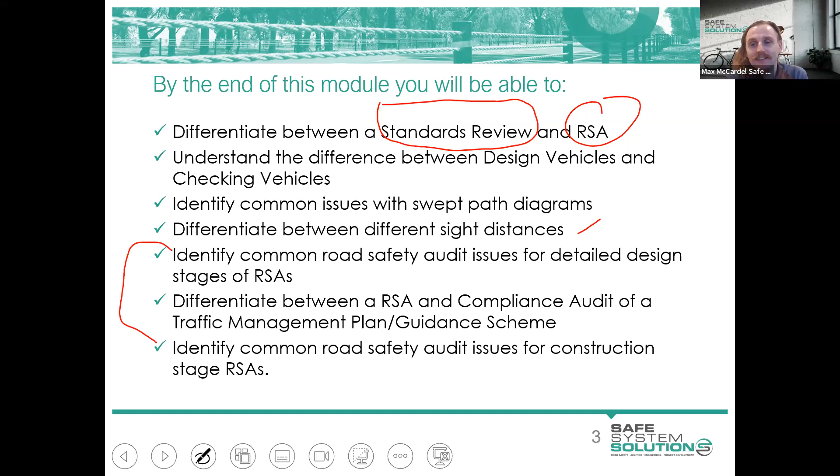This is something that's regularly undertaken as part of detailed designs, and can at times just be snuck in as an appendix and not really interrogated, but there's very good reason to be able to identify what's happening with those swept path diagrams and to be able to ascertain any risks with them. So we'll go through swept path diagrams, lots of different terminology to do with sight distances. And identify common road safety audit issues for detailed design, and then get stuck into the next module, which is all about temporary traffic management.

So I'll get stuck right into it and have a bit of a chat around, well, what is a standards review / design review versus a road safety audit? Those within the design space may be completely across this, and I won't be spelling out anything new, but for those unfamiliar with these terms, they do have two separate functions. A standards review can be undertaken by the design team, and it is just a check against all the assumptions made as part of developing any design.

So just take, if you're designing a roundabout. It'd be looking at all the lane widths, checking all the merge, lane tapers, all those kind of things, checking the circulating area, what is the radius of the roundabout, things like that. Going one by one through all the different variables and checking against Australian standards, the Austroads guides, and importantly, the supplements.

So first question I'll give out to the group is, if you are in the design space, so you're auditing designs, and you've got those Australian standards, you've got the Austroads Guide to Road Design, and then you've got the supplements. The supplements are your specific jurisdiction's additions to any of those other papers. Which one of those takes precedence? So which one would be most applicable to the designer? A few seconds there.

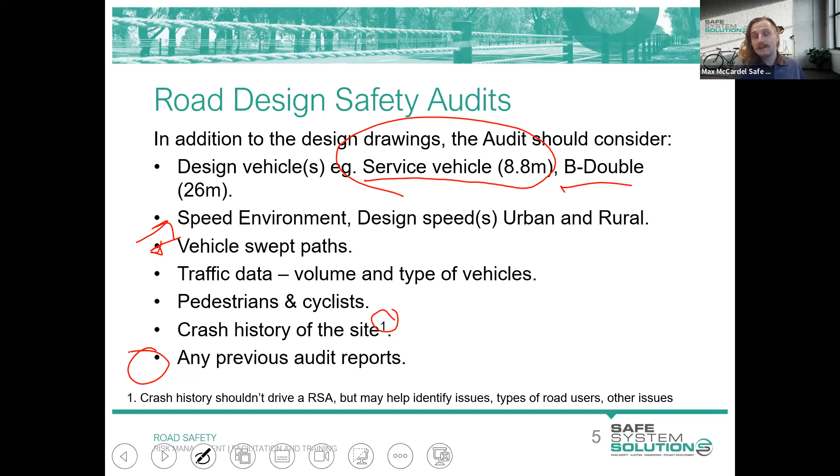Every now and then you'll also get previous audit reports within the area as well, mostly relevant to those larger projects where you will have likely a concept road safety audit. You'll have a functional or preliminary design road safety audit, and you'll have a detailed design, etc. So if you're able to just see how this project has progressed through those audit stages, that can give you additional information as an auditor.

All right, common road safety issues. So design vehicles and swept path. The design does not cater adequately for the swept paths of the chosen design vehicle, or the design vehicle is incorrect. So this was going back to what I was saying before, either having a check vehicle or the service vehicle, which is more common, that's going to be using that facility. So that is generally a garbage truck, just making sure that it can access all areas of our network and is able to safely maneuver around.

And the check vehicles, we do acknowledge that, just based on the sheer space that they require, it's likely that they will be encroaching on areas that are not necessarily the carriageway. So how do we cater for that? And it gets quite technical, because there is definitely an understanding that those larger vehicles could be in scenarios which are not an ideal situation. So they may be having to go across the curb, for instance, sweep across there, or access areas that are just behind the curb.

Ideally, you don't want them anywhere near pedestrians, but I'm sure, as we're all familiar, that does exist on our networks where there are heavy vehicle movements adjacent pedestrian areas, and there have been instances where pedestrians are just standing on the corner of an intersection and just pushing the signals to cross the road, and heavy vehicles that come around collide with those pedestrians.

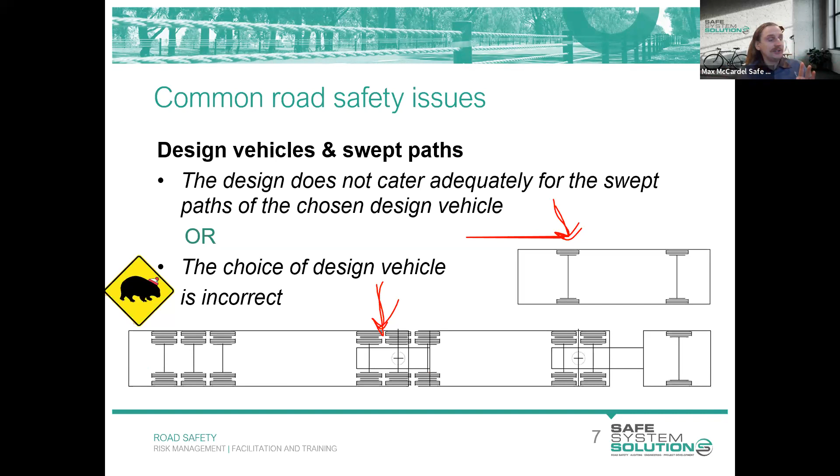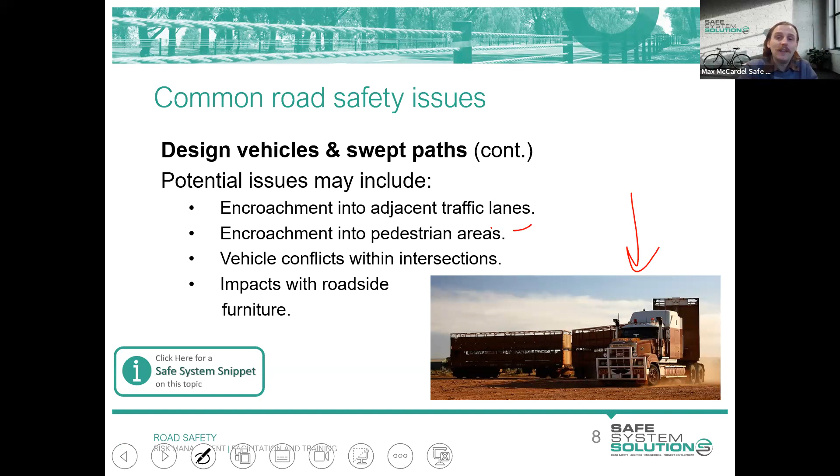Okay, I might just leave that there for the moment and continue going with our heavy vehicles. So as mentioned, it is not uncommon for these larger vehicles to experience encroachment issues. Encroachment just means heading off into the oncoming lane or into other adjacent traffic lanes. The one that we're particularly concerned about is encroachment into pedestrian areas. That's certainly not a good outcome at all. So you want to be picking those up during the design stages and flagging them as risks.

The reason I'm more concerned about that is because it only takes very, very low speeds for a heavy vehicle collision with a pedestrian to result in very, very serious outcomes, as I'm sure you could all appreciate, just given their size and weight. Conversely, if it's a heavy vehicle turning very slowly and they collide with another vehicle in a sideswipe kind of collision, or even a head-on type of collision, it's still not a great outcome, but it's unlikely to be as severe as with a pedestrian.

So certainly in our pedestrian areas, we should be really interrogating vehicle conflicts within intersections and impacts with roadside furniture. It probably won't take you too long, if you were driving along the network, to find signs that have been struck near intersections, and that is likely due to heavy vehicles just being unable to safely perform their movements, or the actual user behavior. They're traveling too quickly through there and getting their trailer stuck on signs and things like that.

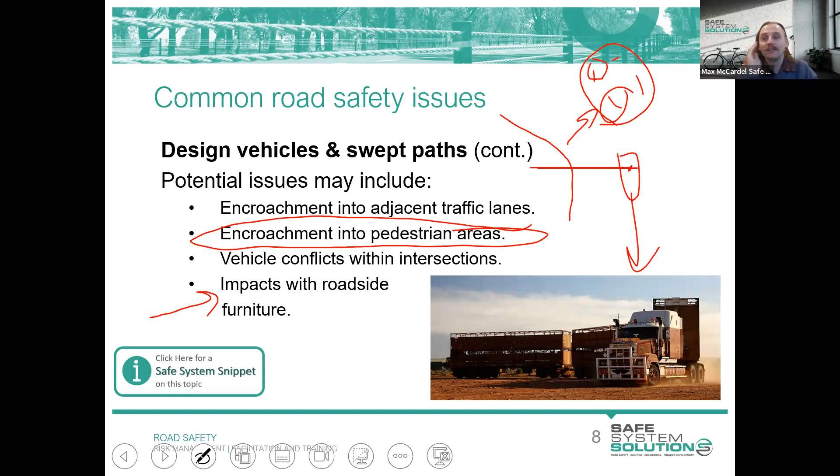The keep left sign, if you're at a roundabout and you've got a little splitter island there, and there's that keep left sign in the middle, that's always the most common one struck, I find. You could also have hazard boards in the middle there. They're also pretty common to be struck by heavy vehicles as well. So just something to make a note of within the design, and whether there's adequate widths there to allow for that swept path movement of your heavy vehicles.

All right, within the Austroads guides, within this appendix, there is a whole raft of information as to how to conduct swept path checks. They are all done by AutoTURN software now, so it's not done by hand anymore, but you need to put these inputs in, or you may already have those variables set up within your software. You need to know exactly where the tires are situated, where the wheel racks are situated, how many wheels you've got, where the articulation sits. You need to know all of those distances, as well as the turning radius at different speeds, which is everything that's provided within the appendices here for the Austroads Guide.

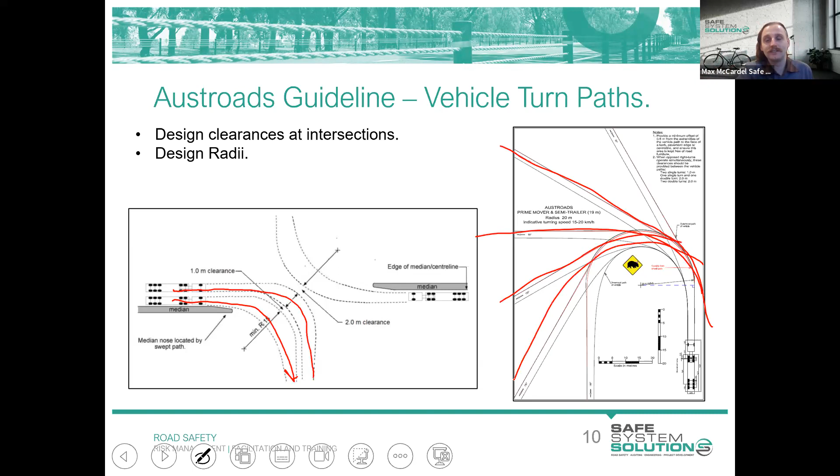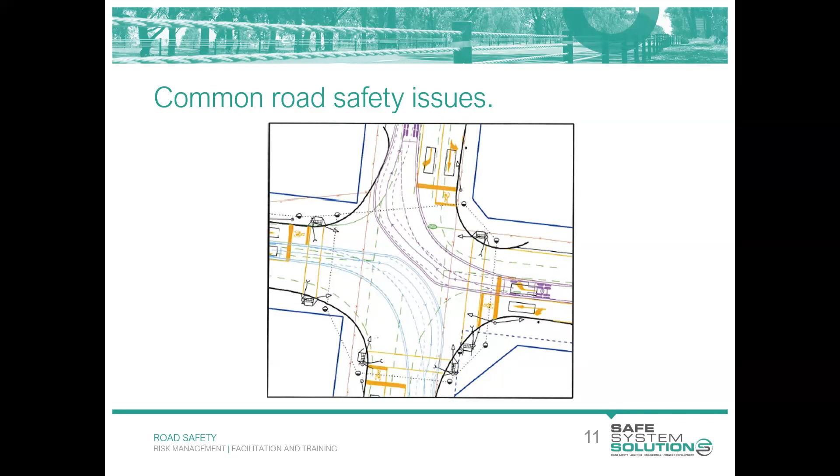Let's give a prize out there, Kathy. Oh, okay, good one. So that auditor's already got their eagle eye vision, spot on there.

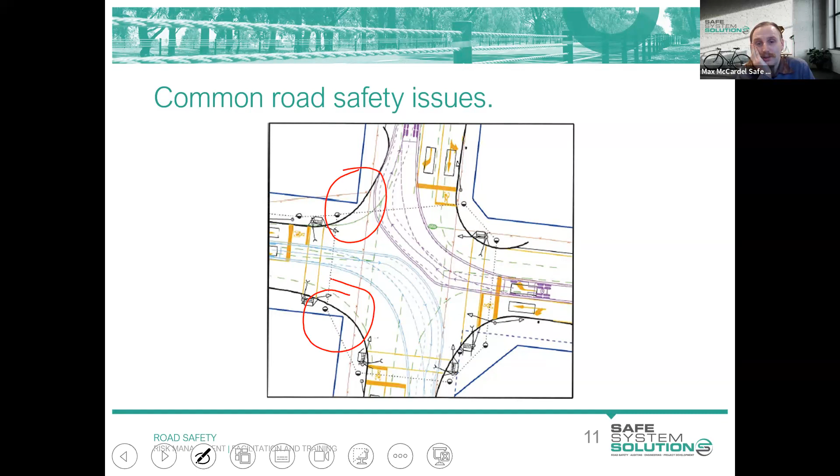I mean, all the footpaths look a little bit strange, but particularly that quadrant and that quadrant, there is really no adequate room there for pedestrians to be able to safely store and access the adjacent footpaths. So that is a pretty significant concern, and one that would require redesign to ensure that pedestrians have connectivity through that intersection. So that is another one I would definitely write up as an audit finding.

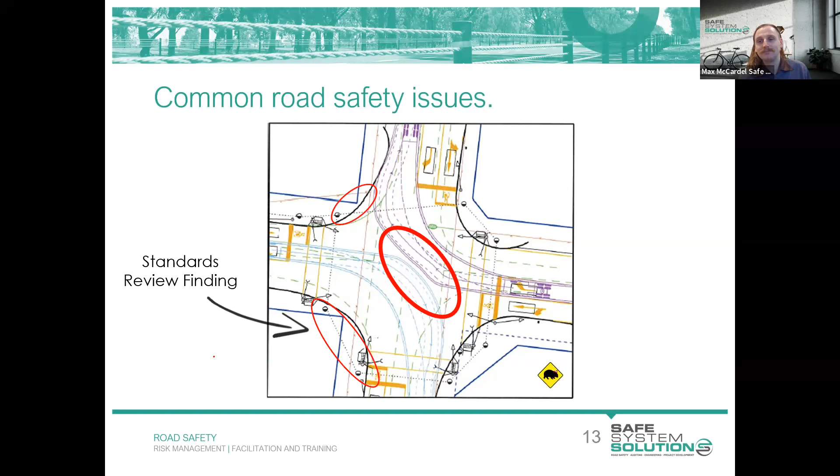The last one I was going to mention, and appreciate if you haven't seen this type of design before, you may not be across it, but these little symbols here are indicative of the pits for your signal hardware and stuff like that. So where all the cabling goes for your signals. And the dotted line is a conduit that runs generally the easiest, most direct way possible.

So that's why it's drawn like that. The issue with that is you're actually showing you're digging underneath an existing building where the property boundary is. So that should be a pretty big flag. That's going to be an issue. You can't just be digging up someone's house to connect from pit to pit.

Now, would you include that as a finding within your road safety audit? You could mention it, but it's really not a safety issue. And you really want to make sure that what you're putting within your audit table are safety risks and things that you've identified with the safety. It's incredibly likely that when this is to be constructed out on site, your contractors wouldn't start digging up buildings just to bring conduit from pit to pit, you would hope. So it's likely that that would be rectified on site.

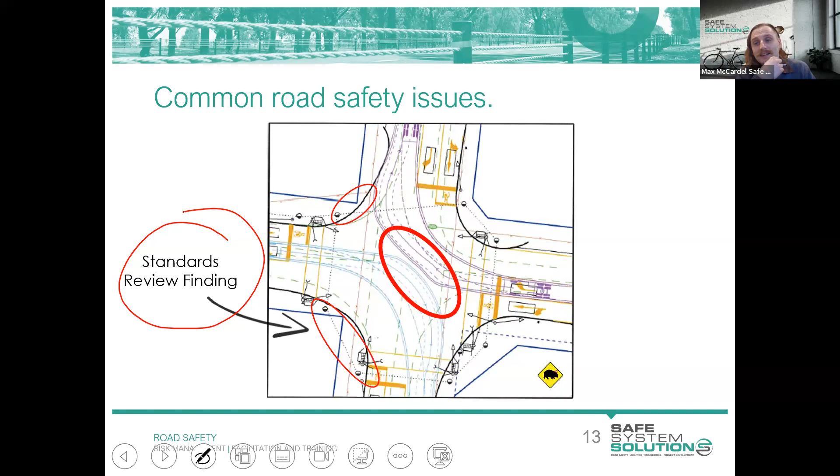It's likely, though, that within a standards review, so when they do all those checks, something like that would get picked up. So one of the standards clauses would be if any of the conduits clash with existing services or property boundaries or easements or anything like that, and that would not pass that test. So it's likely that that would get picked up in a standards review.

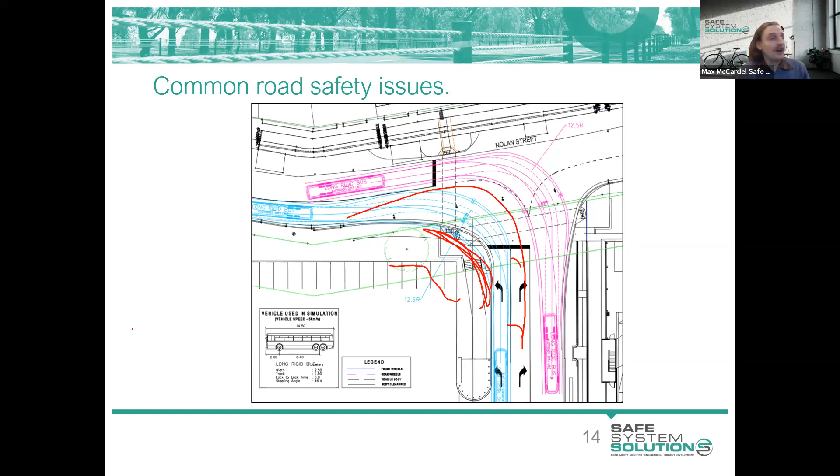All right, sorry, I went on a bit of a tangent there, but a very good question there, Elliot. Thank you.

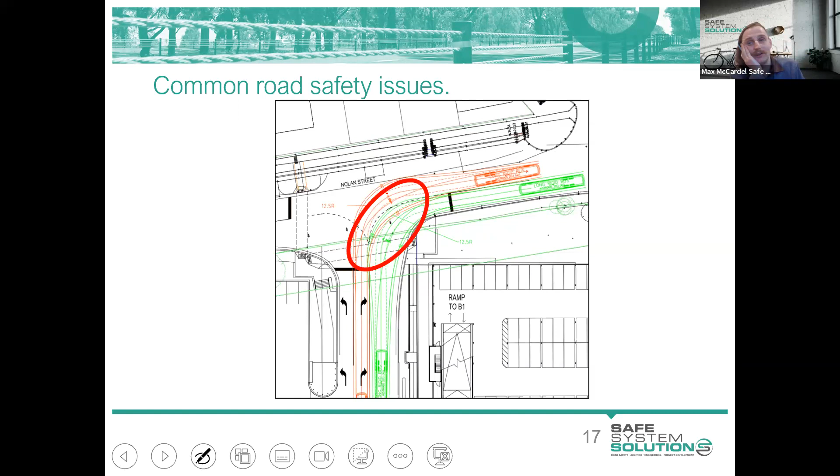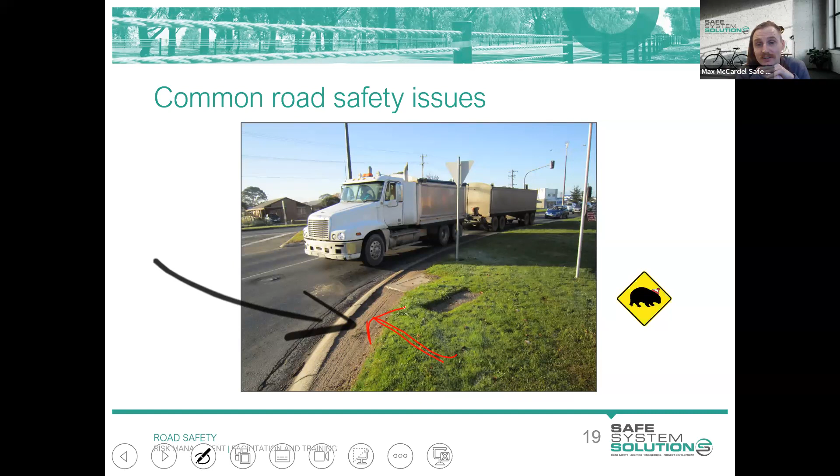If you are doing detailed design audits and it could be an upgrade of an existing site, you'd go out on site and have a look at the lay of the land. A really common thing to see is heavy vehicles and their swept paths traveling beyond the carriageway, so behind the back of curb there. And that's where you can see the tire tracks and things like that. So that could be indicative of already existing swept path concerns or risks, and could be ringing alarm bells for you.

Similar to what we saw with the tyre tracks adjacent to the curb, it's very common to see roadside furniture and signs struck there as well, and also damaged curbs. Also indicative of those areas where swept paths may be an issue.

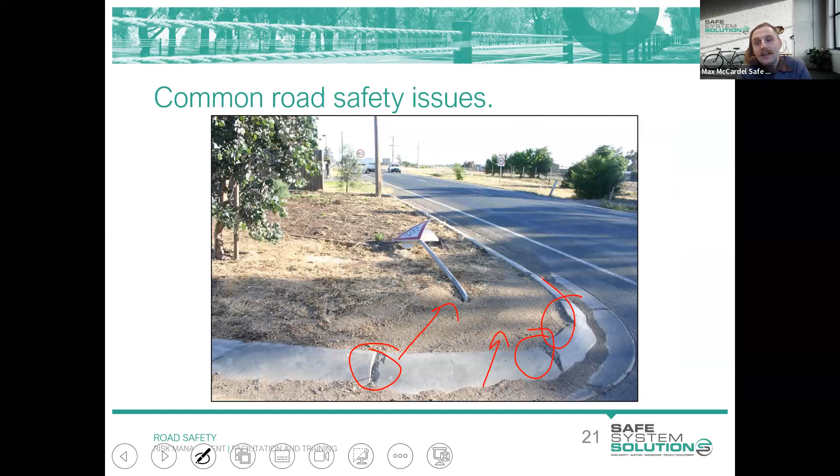All right, we'll hop into sight lines now. And so that's it for the heavy vehicles. We'll move into sight lines. Very common issue across road safety audits in all design stages, but specifically in detailed design, because you would generally have more information about the dimensions of specific things. So where is the parking lane going to start, and where are the pedestals for the signal infrastructure going to be installed, and all those kind of things. So you've got a bit more information to work off, which can give you more opportunity to evaluate the risks associated with any sighting issues.

So there are lots of different sight distance calculations and classifications, and we've got a slide just to go through them. But obviously the issue with sight distances is fairly self-explanatory, even if you're not within the road safety space. If you ask any of your friends or family what's the most dangerous part of the road network, it's very possible they will just answer, it's this local road where there's this hill and it's on a curve and I just can't see anything, and as I'm trying to get out, I'm just hoping for the best and hoping there's no one there.

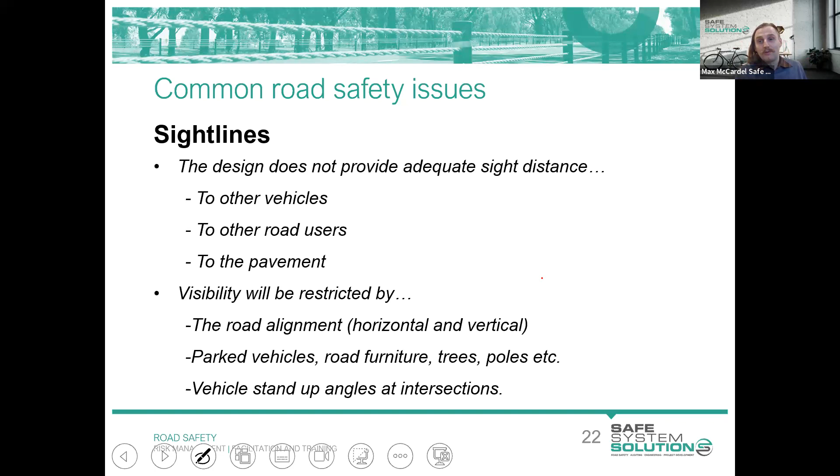So sight lines are a really big issue, and it is where we see a bulk of our trauma occurring due to sightline issues. So one of the sight distance calculations is referred to as SISD.

Kathy, I believe we've actually got a poll for this one, if you don't mind launching the poll. All right, hopefully everyone's seeing that up on their screen. What does SISD stand for? Just to remember, there is no marking associated with these polls. So if you don't know the answer, that's fine. Just pop in a guess. All right, nearly got everyone participated. We'll give you another 10 seconds and then we can close the poll.

So is it standard intersection sight distance, straight incline sight distance, safe intersection sight distance, or somewhat impractical sight distance? And we'll end the poll there and share the results. All right, we've got the majority going with safe intersection sight distance, which is the correct answer. And it's basically just ensuring that vehicles, as they approach the intersection, are able to sight other vehicles. So on the major and the minor road, they have the ability to see each other. There's nothing blocking that line of view.

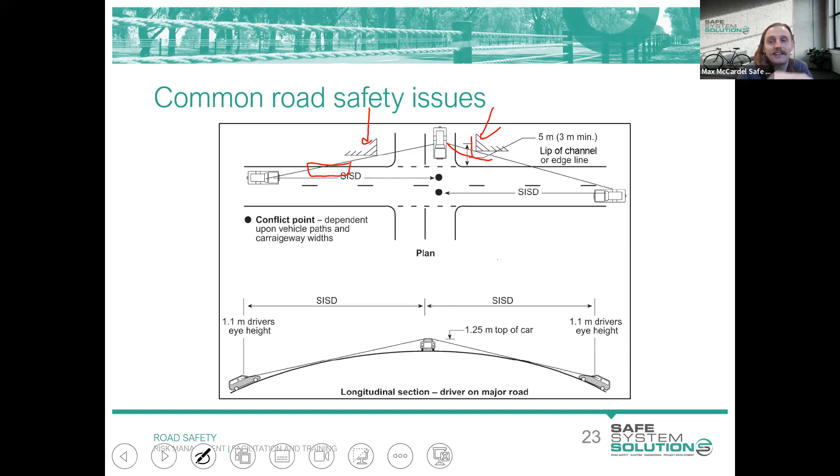Very, very common within these environments: property boundaries that are very close. The closer they get, the more they encroach on that sight distance. And also, of course, our parking lanes. The closer they get, they also encroach on our sight lines, which is exactly what's occurred at this site here. So this was another design that we audited where this road used to operate as a 4-lane, 2-lane each way road. Instead, they wanted to make it a traffic lane, one each way, and then a parking lane. So that is the cross section that they're aiming for.

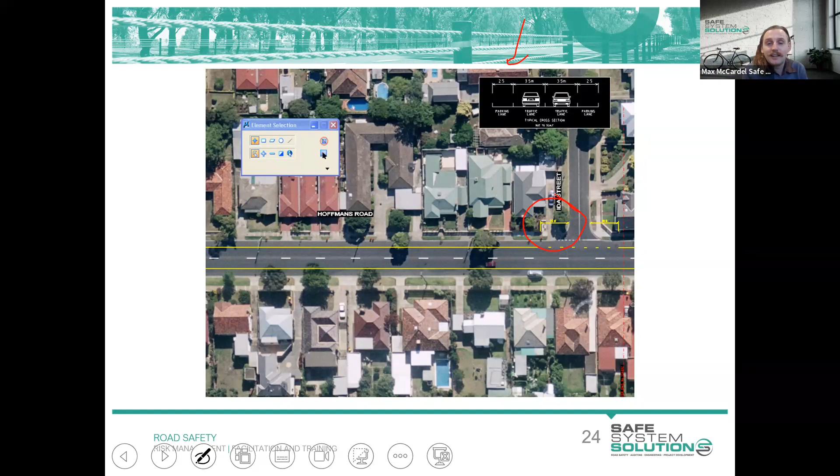And because it's detailed design, they gave you where the parking lane ends there, which I cannot read in that little writing, but out on site, this is what was eventually installed, with this Toyota Camry parked quite close to the thresholds. And this is how things look from our driver's perspective in a moment in time. If we were trying to turn right out of this intersection, just a moment later we may see something that looks like this, a car that just comes out of nowhere.

So it certainly illustrates the importance of maintaining those sight lines, because we don't want to have any of those sudden surprises. We want to make it as obvious as possible for vehicles exiting those intersections to be able to see oncoming traffic and not just hope for the best. Any ideas in terms of treatments, what we could be recommending here to mitigate this risk?

So what could we do to open up sightlines at this site? Max, whilst people are having a think about ways to mitigate it, there was a comment that's come in about the Austroads Guide mentions there should not be any permanent object which impacts the sightline. So parked vehicles are technically not permanent. What are your thoughts there?

Right, and this is a wonderful example of where you as an auditor can extend beyond just what is written within the Austroads Guides or Australian standards or whatever it is, and you can say, I as an auditor think that this is a significant risk in having that Toyota Camry parked there, even if it's only for 2 hours a day or whatever, a significant risk of creating those sightline issues.

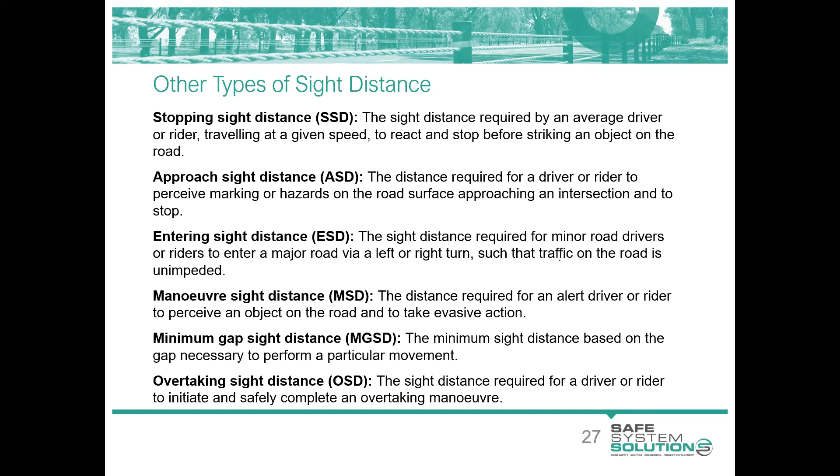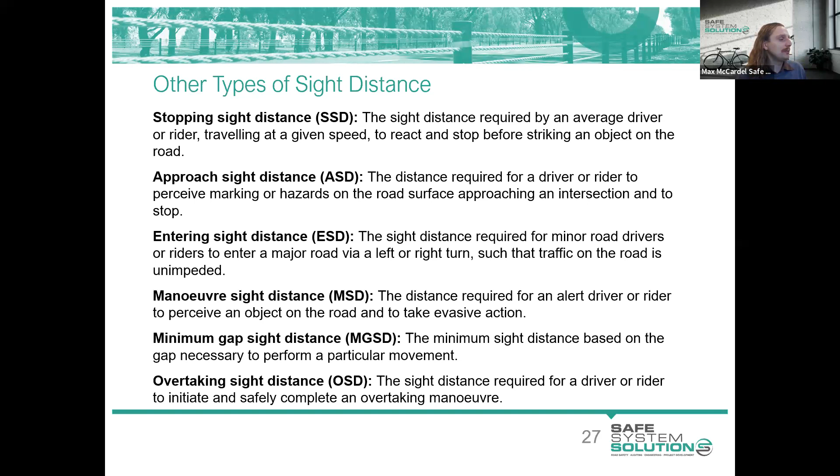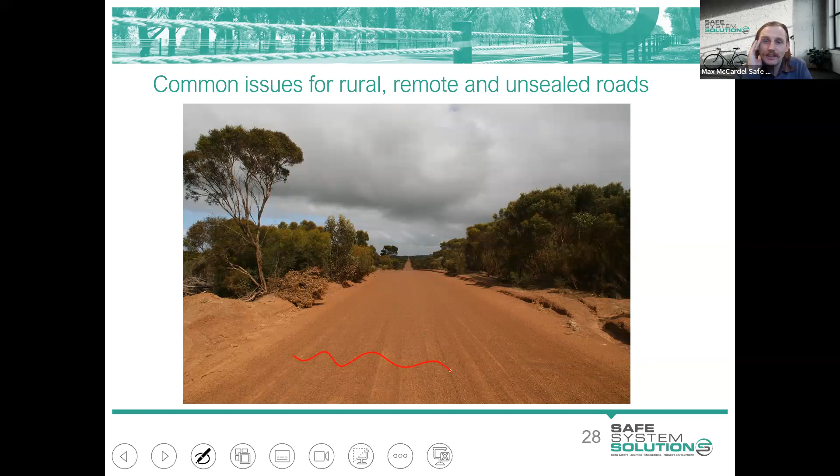Your sight lines here would also be an issue, particularly if you've got any curves. But generally these roads are dead straight for 2,000 kilometers or whatever it is. Surface conditions, different times of the day and different conditions. Because the number of users here is not very high, it's unlikely to see significant capital being invested in these types of roads. So as an auditor, that may then influence what you may be suggesting as treatments.

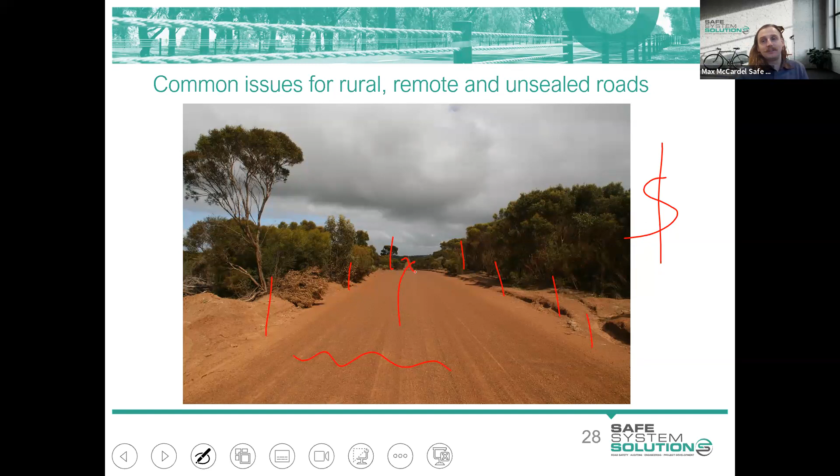So you may not be suggesting full containment barrier along the entire length, because that will cost $2.5 billion. Instead, you may be saying, well, can we just do some guideposts that are evenly spaced so we can demarcate the edge of the carriageway, and some warning signs of the vertical change there, like a dip sign or things like that. So it can be a little bit geared towards what would likely be installed there, given the actual road scenario.

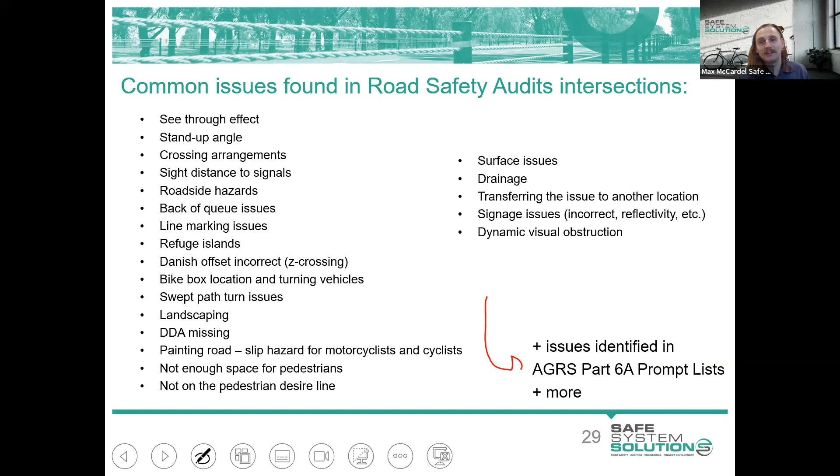For intersections, these are just some dot points here. As I mentioned in the previous module, we do have within the Austroads guides the prompt lists. I've got some slides at the end today to go through that in more detail, but these are some common issues that could be found within intersections. I won't go through them all. Similarly, at mid-block, we've got some typical types of risks. If you've got any questions about those topics, feel free to email me. You may have also realized some of these topics are what we've got you to present as part of your first assignment. You'll be able to share that assignment and read other people's assignments as part of this program, so you may get more information from your peers.

All right. Now we'll talk about temporary traffic management, or construction sites, basically wherever there may be any changes to the road network that could be temporary in nature. So wherever we have roadworks, and what are the specific things we may be looking out for in a road safety audit there. Once again, there are a few different terms you should be aware of within the temporary traffic management space. I may refer to that as TTM, temporary traffic management.

A road safety audit is once again separate to a compliance audit. A compliance audit may happen every day out on site. It may happen twice a day, during peak periods and then during the night time, just to make sure that all the signs are upright, the flags are on the signs when there's workers there, everything's visible and nothing's been lost or stolen. Compliance is much more of a, yep, that's there, that's there, that's done. A road safety audit is, once again, bigger picture, thinking of the safety of all road users within the area.

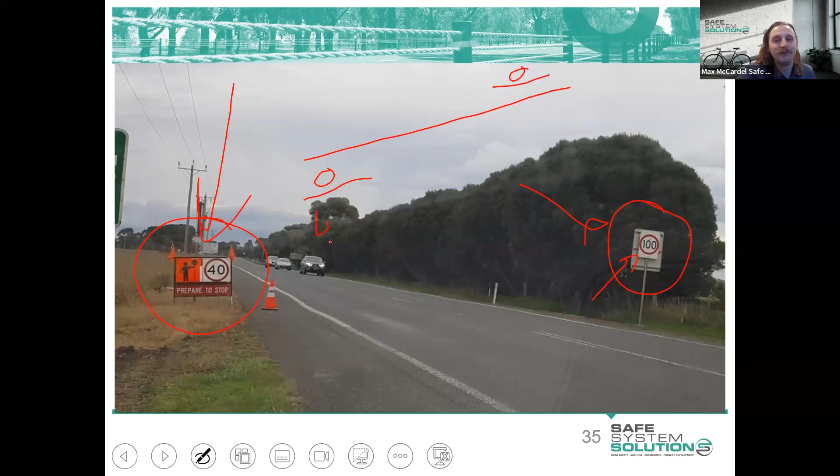Like the offside rule in soccer, Max. Sorry, I'm going to take us completely off track. Go for it. But we could actually measure exactly what the line of the... anyway. Gone completely into technicalities. Okay. And see which sign is a millimeter ahead of the other one, and then that one applies. So there you go. Yeah. So it could be 40 from there to there, and then 100 from there on. Yes. Good thinking. That's probably the most legally accurate, I would say. Sorry. VAR check. World Cup is going well. Okay, sorry, back on track.

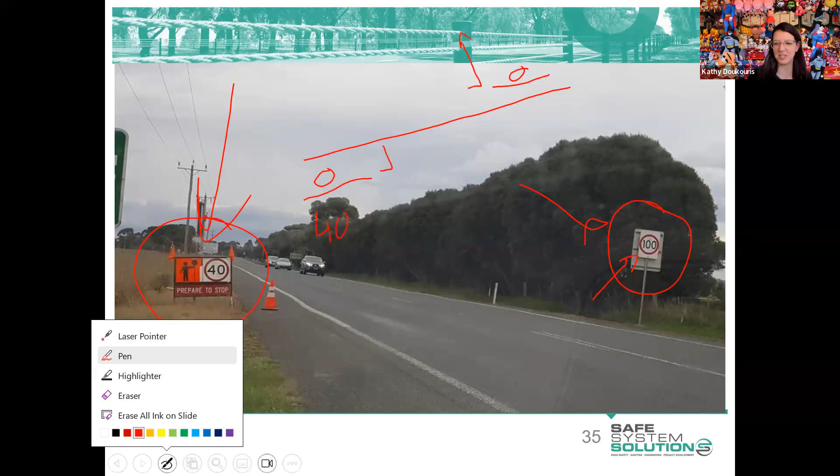Yeah. But I mean, it's clearly not difficult to see why that is an issue, because you do not want to create ambiguity. You do not want to create this scenario where people will be driving to a speed that they think is appropriate, or what they have understood it is meant to be. You want to make it as unambiguous, as overt as possible. So you want to be covering up any existing signage like that. But it is an incredibly common thing to see as part of traffic management plans that are being rolled out.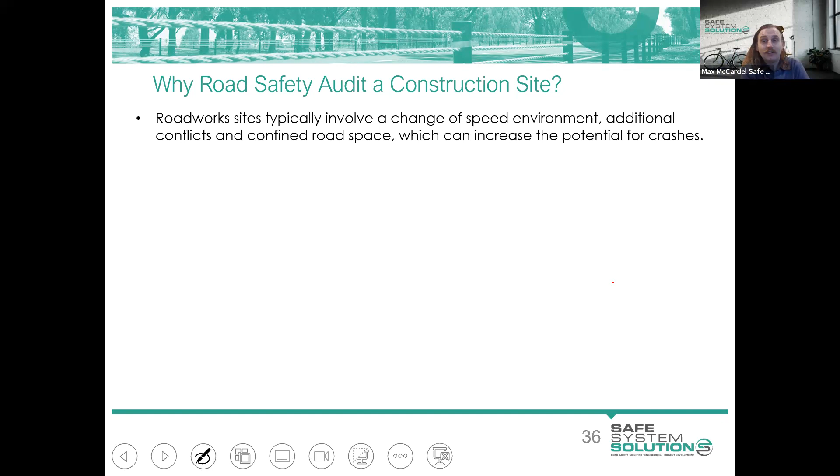But the speed environment is also a really critical one there, where you do have these speed changes, particularly dropping down to 40 kilometers per hour in Victoria. Does anyone know the speed limits for roadworks within South Australia? That's another little trivia question for you. 25 is correct. Where you've got those speed changes, because we are creatures of habit and we're used to going a particular speed, to drop down to those lower speeds can be also very difficult to manage.

And as we know, our road workers, because they are pedestrians, are referred to as vulnerable road users. And the speed that ideally we should be aiming for if a conflict were to occur should be 30 kilometers per hour or below, with our safe system hat on. So even with the 40 kilometer speed that we have as the default in most of our jurisdictions, SA excluded, we're clearly not hitting that target. So we want to be doing an RSA because it's got that change in the speed environment, closing off lanes. Things are changing in the road, which is generally not a good thing.

There can also be multiple changes and multiple setups for one site. So as I mentioned before, if you've got a larger project where you may have traffic on one side of a carriageway and then it gets flipped over to the other side, you may actually conduct multiple RSAs at different stages of that temporary traffic management setup, just to ensure that the risks are adequately covered off.

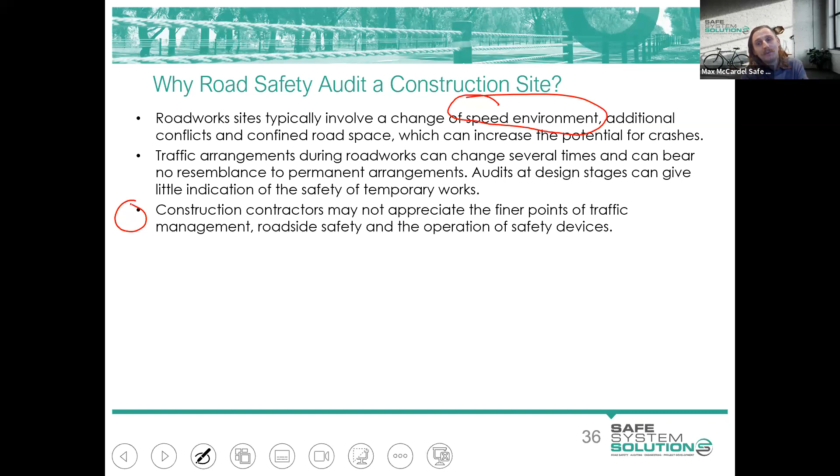As an example, I'll use a property developer, and they are building residential development, and they have to slow down the adjacent arterial road network because they're installing a new intersection, whatever it is. It's possible that they do not have any safe system training or any traffic engineering training. Their job is to build residential properties, and they will do so at the quality and cost constraints that they have, and that's what they'll be focused on.

And so if they're required to do a road safety audit, and they perhaps don't understand the point of it, and they don't really understand the benefit of conducting these things, and they just take it as a checklist kind of activity that has to be done, they may also try and roll it into a compliance audit and just say, we've done the road safety audit because we've done a compliance audit, but no, they're different things.

So yeah, it is possible that you will run into construction companies that will have this attitude of it's just traffic management, and they just have to slow down the road. But it is certainly a high risk activity and something that needs to be thought about.

Checking that the standard arrangements are applied for consistency. It really bugs me when you see the exact same site and they've got different temporary traffic management signs. Some of them use symbols, some of them use words, some of them use different fonts. The thing about fonts that really irks me is it's surely more difficult to get non-standard fonts because you have to go and get that made up.

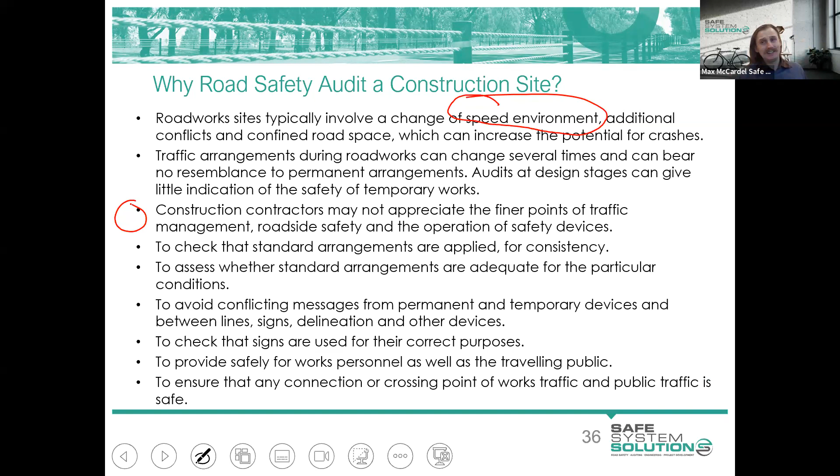Check that signs are used for their correct purposes, provide safety for personnel, to ensure that any connection or crossing of just general public is also maintained throughout. There's lots of examples of that not being achieved, particularly pedestrians and cyclists. I'm going to say cyclists is a really, really big one, where you may be closing off a traffic lane and your approach is just to do a merge, so it's just 2 lanes merge into one, with no thought about how a bicycle, if there was a bicycle lane, how that would actually be continued through there as well.

So is it the expectation that what was once a bicycle lane in its own separate facility is now merging across the traffic lanes and is just riding in a traffic lane and is expected to travel at 40 kilometers per hour? Because that is an incredibly stressful thing to do as a cyclist. And if you're not comfortable or you're unable to ride that fast, that is also a very, very terrible outcome.

But something that a road safety audit would pick up is, what are the road users within the area? So are they pedestrians? Are they cyclists? Are there people on horses, for instance? And how are their needs being supported by this traffic management setup that you've got in place, or what could be improved there? So there is certainly lots of work to be done within that space.

A really, really common approach, sorry to go on about cycling, a really common approach for traffic management schemes adjacent bicycle lanes is just to close the bicycle facility. And that's it, bicycle lane closed. And my little anecdote or wisdom that I could share there is, imagine if you had a traffic lane and you just put up a sign that just says traffic lane closed, and that was it. And you're like, job done. That's just unthinkable that you could achieve that.

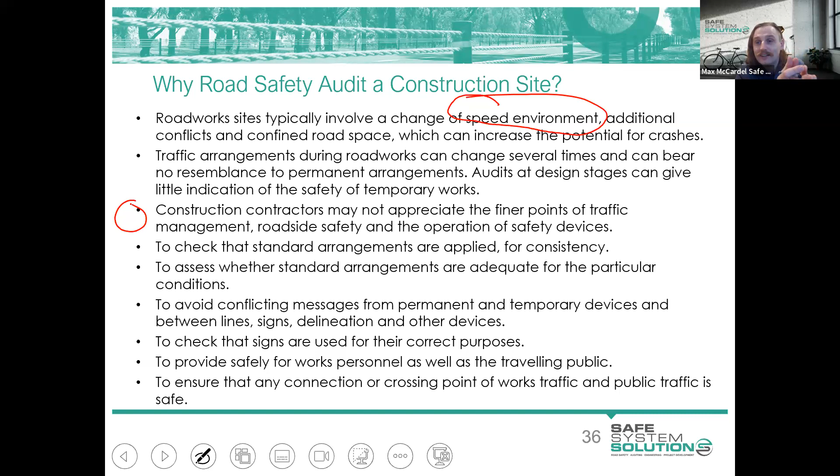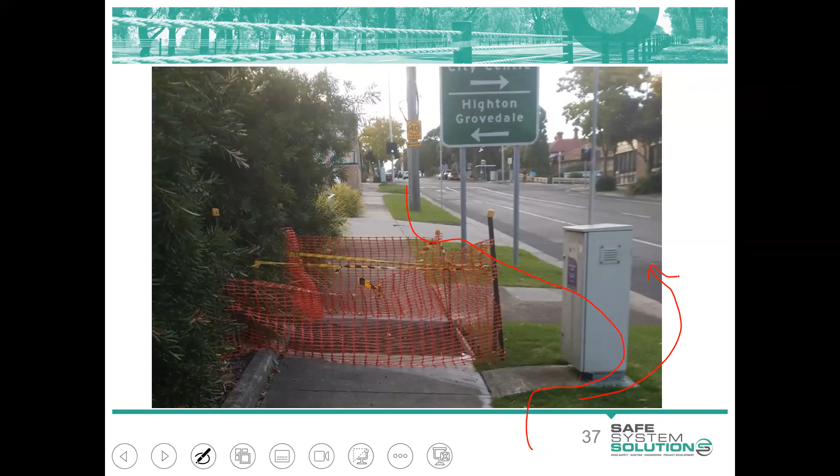And I'm just going to jump in there too, Max. We wouldn't accept it for the road, would we? No, absolutely not. Just be unheard of. Yet it's accepted. And it's one of those things as well. If you have ever been in a wheelchair, maybe you've suffered an injury, or you've been on crutches, or you've had back issues, or you've been with a person with those issues, you don't realize how just the smallest things like this or changes in the level of a footpath really impact the serviceability of this infrastructure. So it can seem quite negligible, but it can make the world of difference for those that operate within this space.

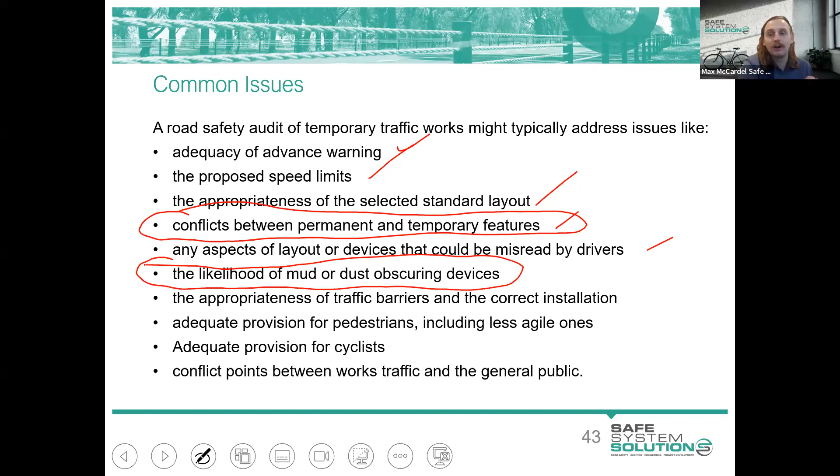be ambiguous for drivers. Likelihood of mud and dust is really common as well, because these are adjacent construction sites where there is excavation and vehicles tracking onto the carriageway with dirty tires. It's really common to see signs get dirty and dusty quite quickly. During the daytime, you may not notice it as much. It is the night inspection where that becomes particularly relevant and the risk is exacerbated. So it's really important to have that.

Appropriateness of traffic barriers and correct installation. We have an entire course on road safety barriers, and it goes into the temporary traffic barrier world. It is a complete world in itself, with lots of different systems out there. In my experience on site, it's very common to see water-filled barriers used in construction sites, and the risk I've found is they are not filled with water. So they are just giant plastic shells sitting there, not doing much. They should obviously be installed the way the manufacturer has specified.

Adequate provision for pedestrians and other vulnerable road users, such as cyclists, and conflict points between works traffic and the general public. Particularly on larger sites, you will notice there are generally site entry signs, or this is where works traffic enter. How do you keep the general public out of there? How do you make sure they don't feel like that's just part of the carriageway?

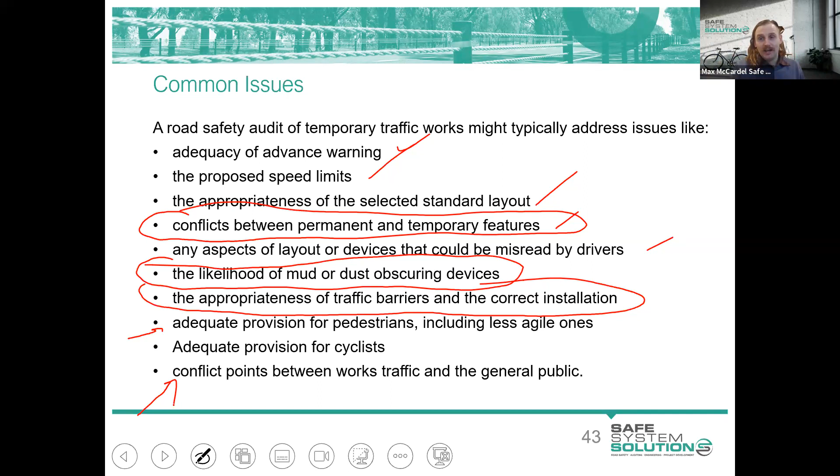That was all the content I was going to go through for our TTM. Did I miss any questions there, Kathy? I saw there was some good chatter going through there. Yeah, lots of good chatter, but no, I think we're all good. Everybody's sorting themselves out, so it's terrific. Thank you, everybody, for doing that. All right. But we might have some questions, so it might be a bit of question time for you, Max,

or for anyone. Sid's asking, could TGS be self-sufficient without a TMP? Is a TMP necessary for all roadwork, even if it's minimal, static, and located 6 meters away from traffic? I'm considering the cost implications that a fully fledged TMP adds to a project.

Okay, so I'm happy for anyone else to dive into this if you've got your own experiences, but from my experience, there are examples where TGS alone is okay. An example of that could be, say, a community event where they want to close down the main street because they want to have horse and carriage going down there and live music and things like that. They may just provide a TGS to show how that will be managed, and that will be it. For the larger projects where there are added complexities is where you'd want to see TMPs.

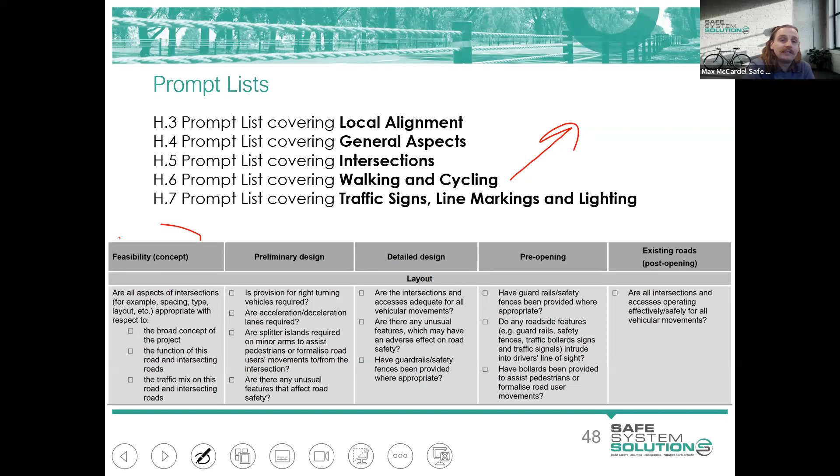Lots of different prompt lists covering specific themes or categories. So, for instance, if you've got a project that has to do with pedestrians or the bicycle network, perhaps you'd flip to H.6, which covers walking and cycling. And as part of these tables, the way it's split up takes you into different stages of the audit, whether that's a concept design or an existing road.

And it once again sets out some questions to ask yourself as an auditor. These are things that could be risks. Have you thought about them? So just as an example, if you're doing the detailed design of an intersection, this particular snip is from an intersection. One of the questions you could ask yourself is, have guardrails, safety fences been provided where appropriate? So you're like, yeah, I didn't even think to check if the designers have nominated any barriers.

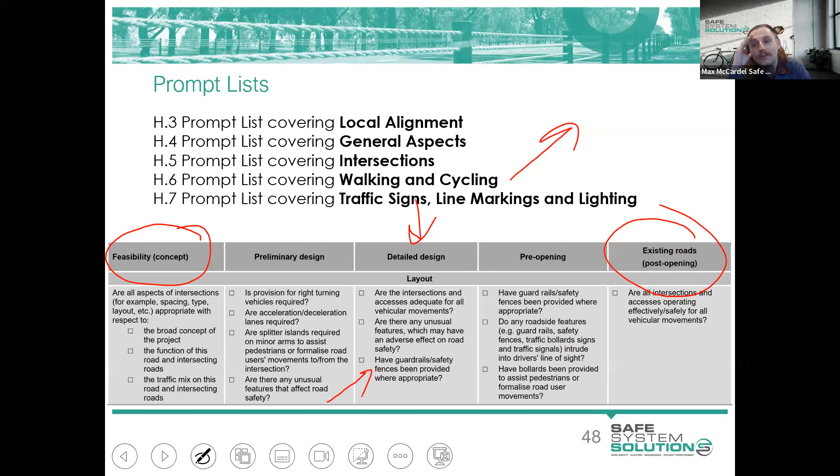Should I follow it up with the designer? Maybe I should. So it can help shift your thinking into what are the road safety risks and what should I be looking out for. So really useful tool for you there.

All right, a few key takeaways: prompt lists are thought starters only. Stand back, look broadly at the project. A lot of the time you will have things within the prompt list that are just not at all relevant to your project, because they are generic in nature and trying to cover a large expanse of different possible scenarios. There's going to be lots of examples that are just not relevant at all. You do not submit your prompt list with the report. Okay.

The final slide I had was just going to chat through the difference between a primary treatment and a supporting treatment. This is a requirement within conducting a road safety audit. You need to define whether your recommendation is considered primary or supporting. There is a little bit of literature within the road safety audit guides about what that means, but there are actually better examples within this document, the Safe System Assessment Framework. So if you type that into Google or Austroads, you can have a flick through and type in primary treatment, and it shows you specific examples of both primary and supporting treatments.

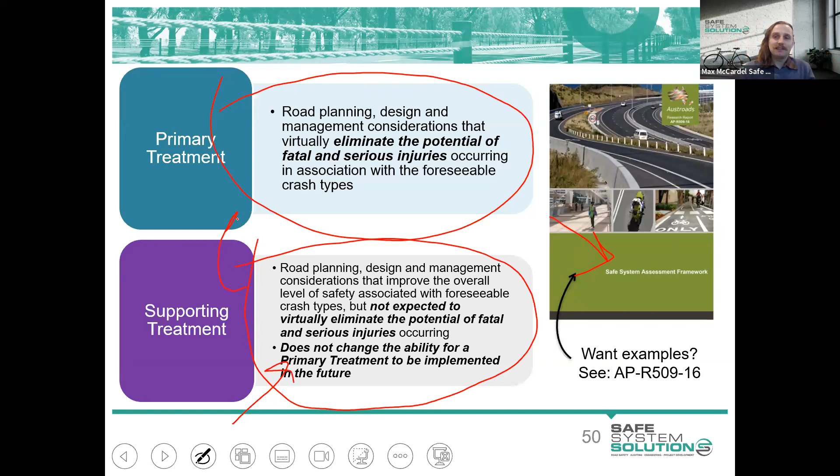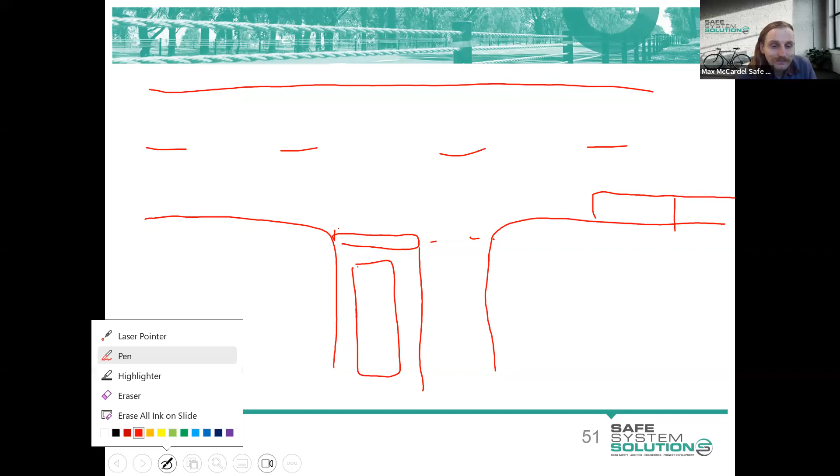Perhaps I might do a little sketch here to show you a real life example. Going back to that safe intersection sight distance, we had a T intersection and our parking lane there. We had our hold line. That's a pretty good drawing. And then our vehicle that's exiting there, and there's our parked vehicles. Something like that as our carriageway. Now, one of the suggestions we had was removing the first car park to open up sight lines. So if we put that in our recommendation, actually, I'll go back a step.

If I was an auditor auditing this, I'd say I'm worried about the sightline issues due to the parked cars. A vehicle exiting here may collide with oncoming traffic because they're unable to see each other. So that intersection crash is what I have noted as the risk. I then put forward in my recommendation: remove one car park bay, or however many car parks, to open up sight lines. That would actually fit within a supporting treatment.

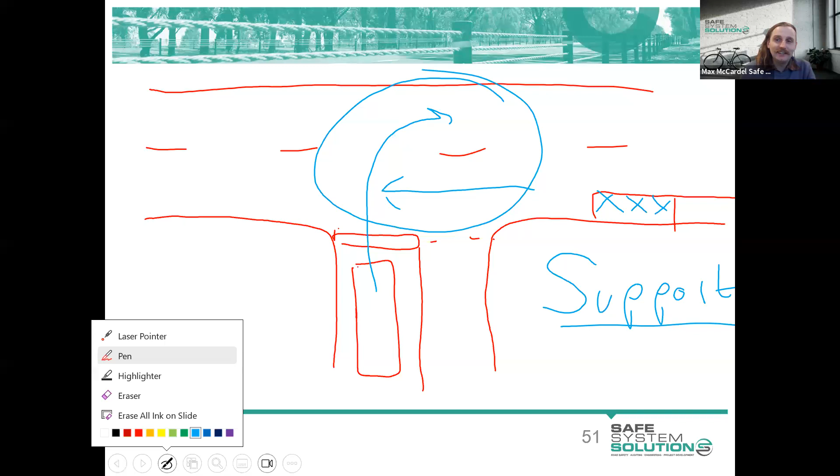Because it is improving the level of safety, but this crash type can still occur. It is still possible that the vehicle exiting a minor leg misjudges the gap in the traffic or thinks that the vehicle is going slower than it actually is. So you would still classify that as a supporting treatment. Any treatments that you could perhaps recommend here as a primary? I can already see one in there.

I'm going to draw another car because I really like drawing. Beautiful, Max. It's beautiful. Thank you, Kathy.

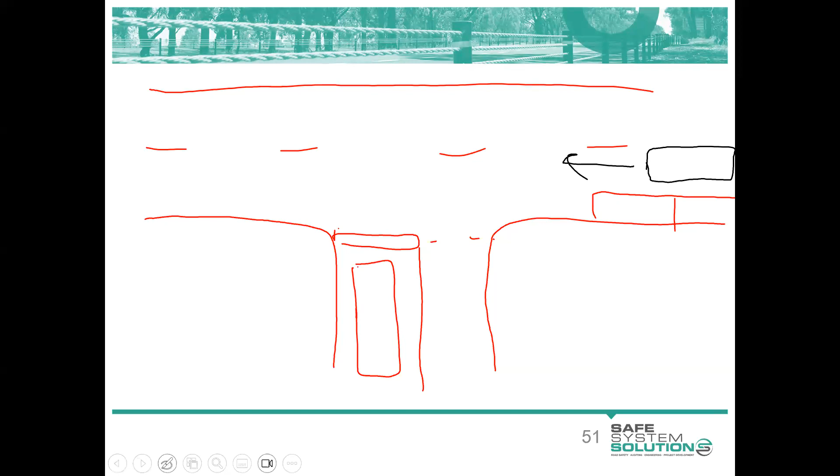Okay, we've got traffic signals, raised platform, traffic lights, grade separation, left turn only, RAB roundabout. Okay. Nice. So are they all primary? Bit to go through there. First, grade separation. Absolutely. If you are completely removing those two interactions, then they can't have an intersection crash because there's no intersection anymore. So that's definitely listed as a primary.

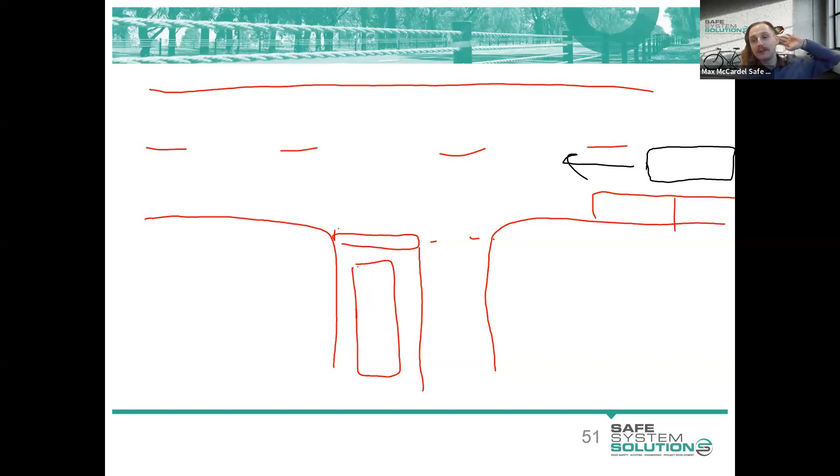A raised platform, if you were able to bring speeds down to 50 kilometers per hour or below, that's the speed that we are concerned about at those intersection crashes, then yes, you could list that as a primary. The traffic signals, if you were to signalize this, yes, that would definitely improve the level of safety. However, that crash risk that I drew before of the intersection still exists because it's still possible for red light running. So that vehicle could just drive straight through the traffic signals and you've still got that. So you have not virtually eliminated the risk. There still is that risk. So I would put signals as supporting.

Closing the intersection of the side, yep, anything like that would work. The left turn only, it's a good question. So left turn, would you put that? It still is possible to have this intersection crash. Admittedly, the angles would be slightly better, so it's not quite perpendicular there. Yeah, generally I would consider that still as a supporting though.

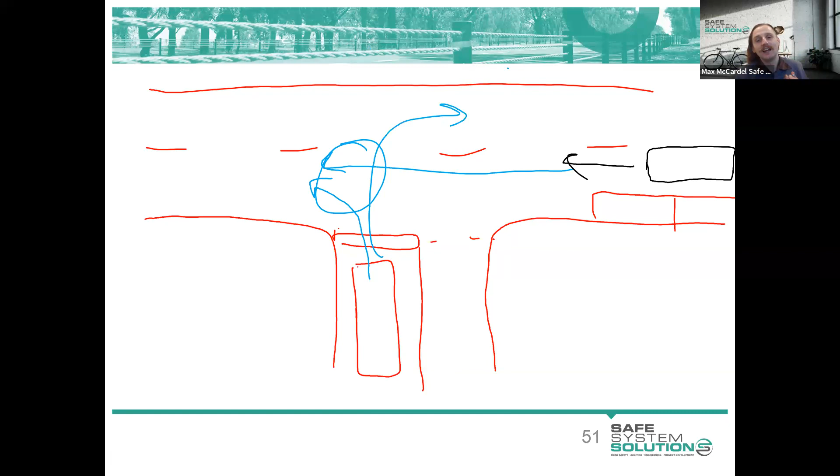It's a pretty good question though, because unless you could get some real analysis as to exactly the angle expected from banning the right turn movements, what would be the conflict angle? And you could justify that it's not going to be 90 degrees, it will be much more acute, more like a roundabout. Then you could probably justify and say that it's probably within the survivable limits.

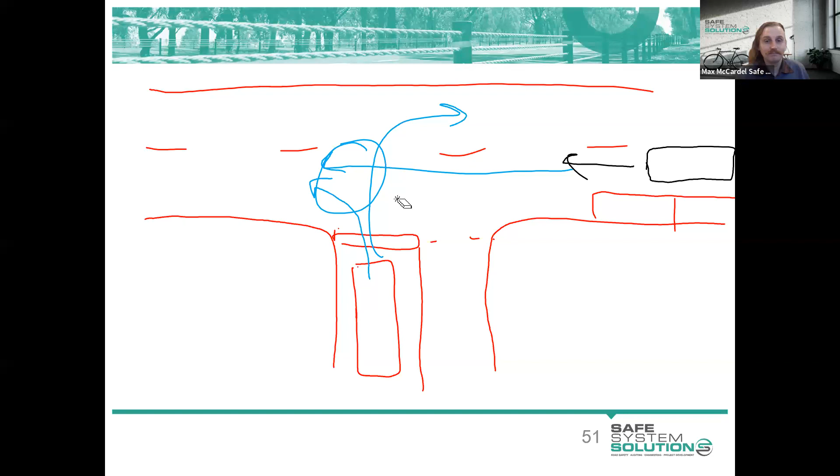Kathy. Max, I just want to take another moment to acknowledge your beautiful drawing.

But what I'm going to do is take over as I do, because I thought while you're talking about that, we could actually show people the, which one is it? Here we go. It's in the resources section. We have the Safe System Assessment Framework. Sorry, my computer's doing something funny now and it opens up like this. But anyway, the front cover of it looks like that. So this is your friend.

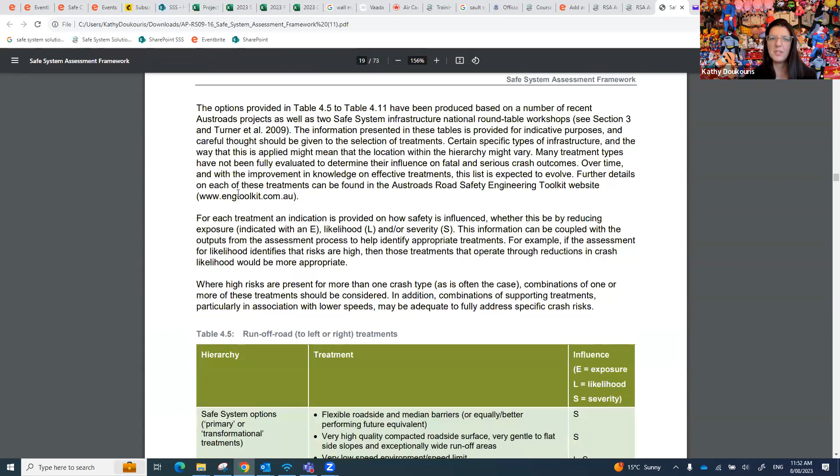And if you jump down a few pages to these beautifully coloured tables, this talks about the primary and supporting treatments in more detail. So here the green is primary. And then the supporting treatments, I don't know why they split it, but they like to use a bit of yellow and a bit of orange. And so I just went to the intersection. Now, Max, if I understand right, this is not an exhaustive list of treatments, is it? That's correct. But there you go. Perfect. So a really useful reference when you are doing your recommendations for your audit findings. And if you're not convinced if it should be primary or supporting, just have a flick through that document and you'll hopefully get a bit more insight.